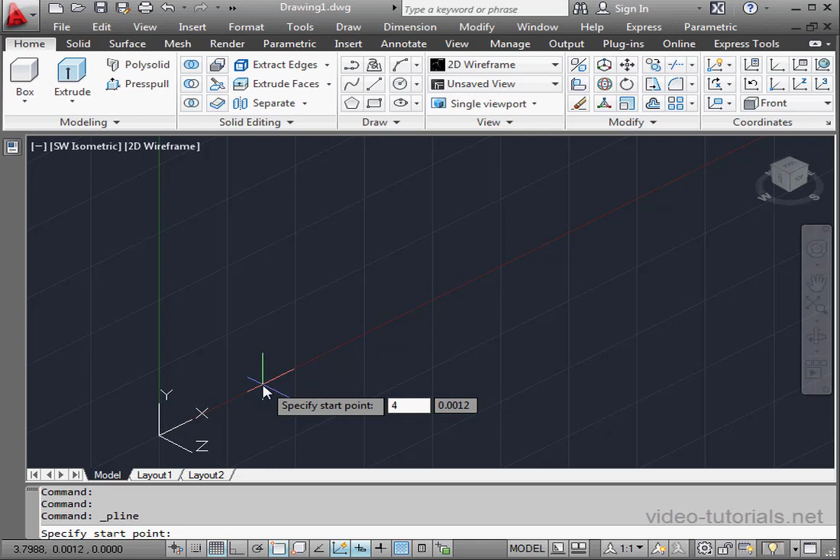First, let's change the user coordinate system to front. Now activate the polyline command. Here's my start point. 4, tab 0, press enter. Let's activate ortho mode. That'll speed things up a bit. The first line, 7.5, enter.

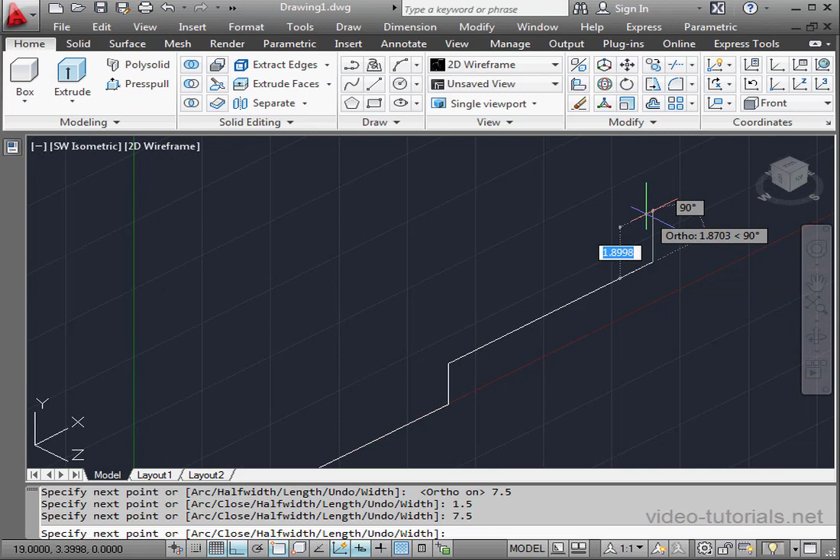Second line, 1.5, press enter. Another line, 7.5, press enter. And a vertical line, 2.5, enter. Another horizontal line, 7.5, press enter. 0.5, press enter. And another 7.5, enter. Let's right-click and select Close.

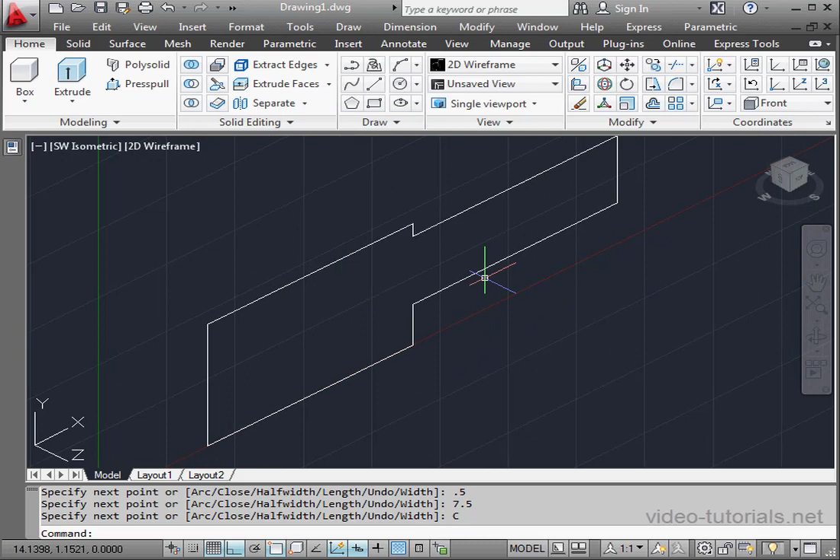Next, I'm going to place a circle. I'll use the triple tangent option. Here's my first point of tangency, the second and third. And here's my circle. Now let's activate the Trim tool. Press Enter to trim everything by everything else. Just left-click to trim my geometry. And let's press Escape to exit the tool.

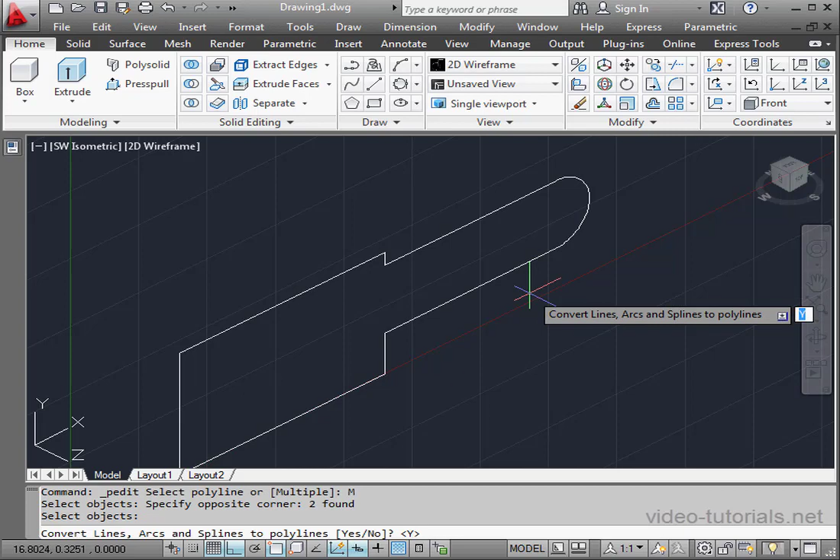Now we need to create a closed profile. To do so, I'll use the Edit Polyline command. Let's right-click and scroll to Multiple. Now we'll window select our geometry. Right-click to finish the selection. Convert to Polyline, type Y for yes, and press Enter. Let's select the Join option. For the fuzz distance, 0. Escape to exit the tool.

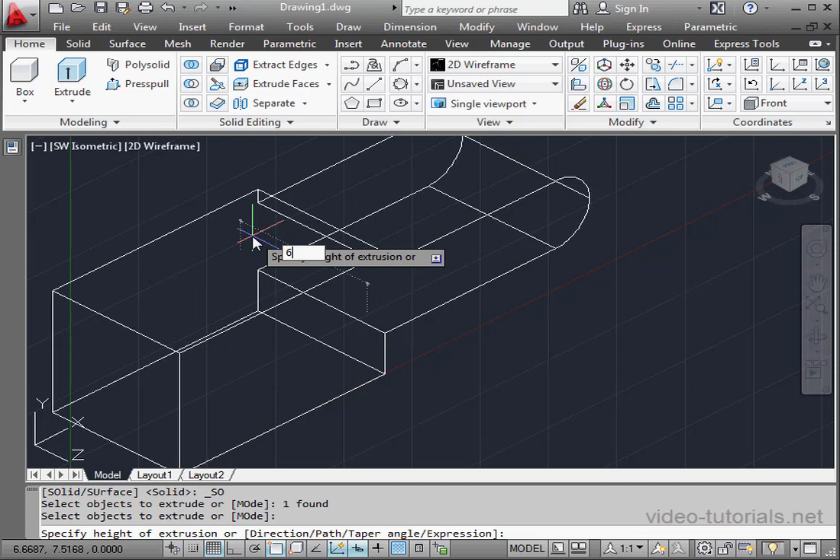Here's our closed profile. Let's activate the Extrude command now. Select our profile. Right-click to finish the selection. The distance will be 6 units. Press Enter to accept. Now let's go to the Solid tab.

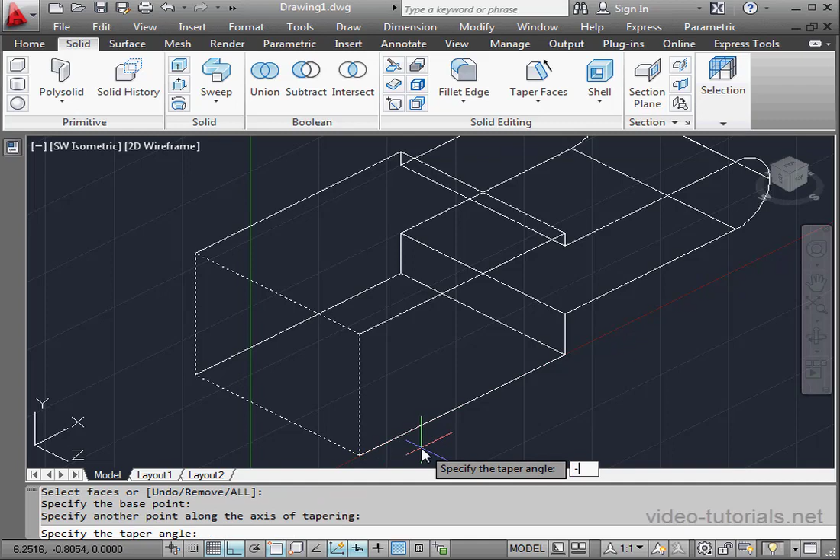I'm going to activate the Taper Faces command. Select the face to taper. Right-click and Enter to finish the selection. We specify the base point, then the second point. Now the taper angle, let's say -5 degrees.

Enter to accept. Taper again, select our faces. Right-click and Enter to finish the selection. Select the base point. And the second point, taper angle, will be -5 degrees. Enter to accept. And Escape to exit the tool.

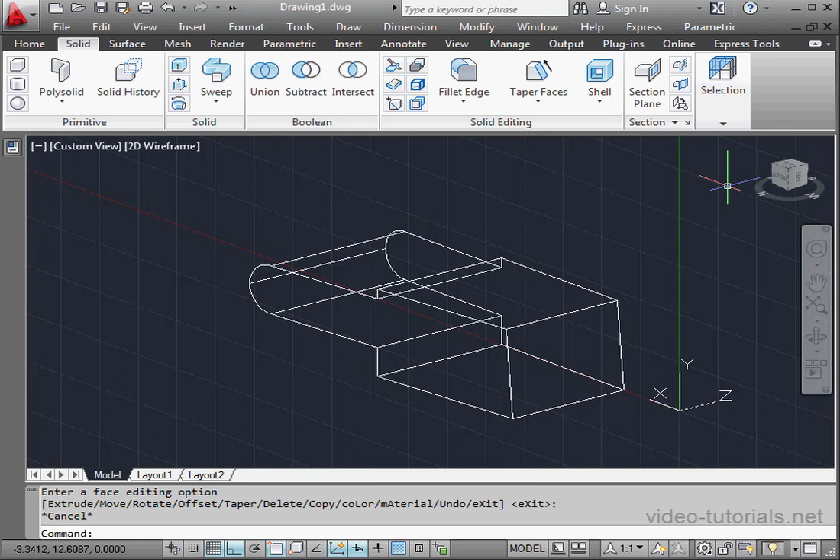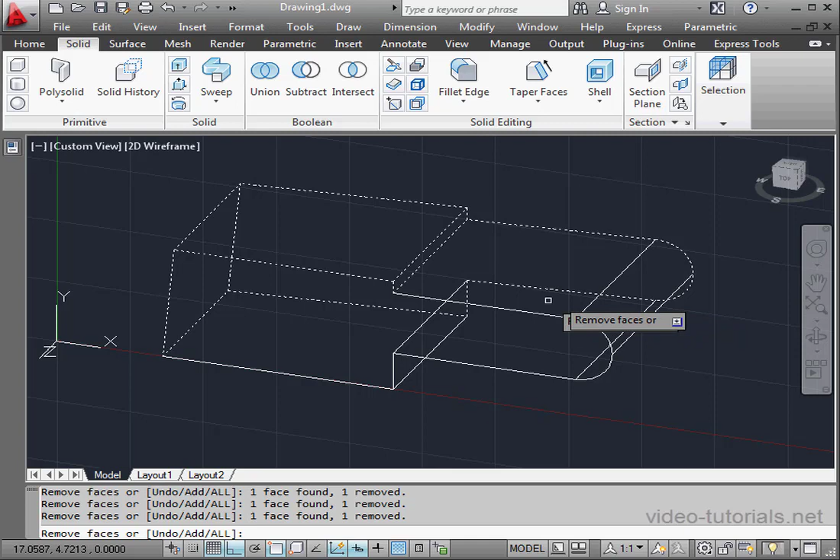Now let's activate the Shell command. Select the solid. Right-click. Now let's select the faces to remove. And this face as well. Lastly, over here. Press Enter to finish the selection. Now we're prompted for the offset distance. Let's say 0.2 units. Enter to accept and execute. And let's exit the tool. By the way, one thing I did forget to mention, these measurements are done in centimeters.

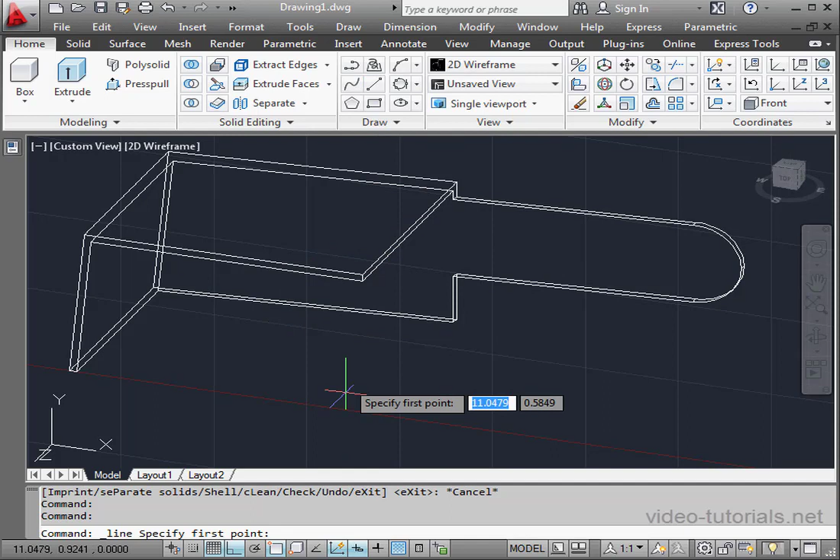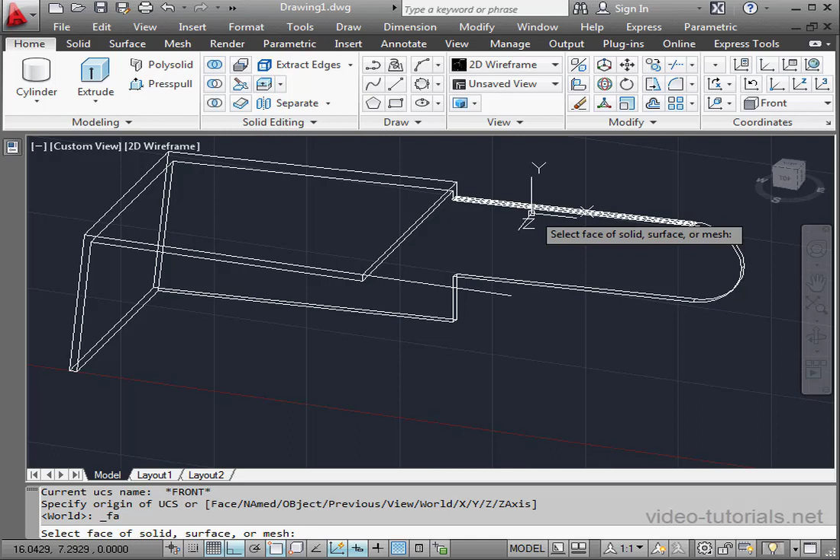Let's go back to the Home tab. Activate the Line command. Dynamic UCS is active, as well as Ortho mode, which is toggled on. Let's say 4 units here. Press Enter and Escape to exit the tool. Now bring in a cylinder primitive, center point, radius. Oops, I forgot to change the user coordinate system. Let's select the face, accept.

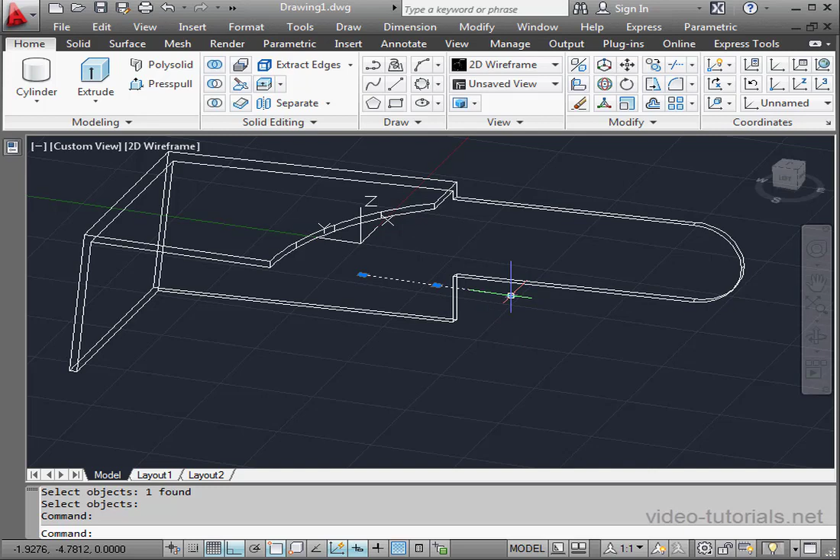Now bring in the cylinder tool. Radius will be 6.5 units. Press Enter to accept. And for the height, just drag it down so it goes through the whole solid. Now we're ready for the Solid Subtract tool. Select the shell, right-click, now the cylinder, and right-click to finish and execute. Let's select this line and delete it. And let's go back to the World User Coordinate System.

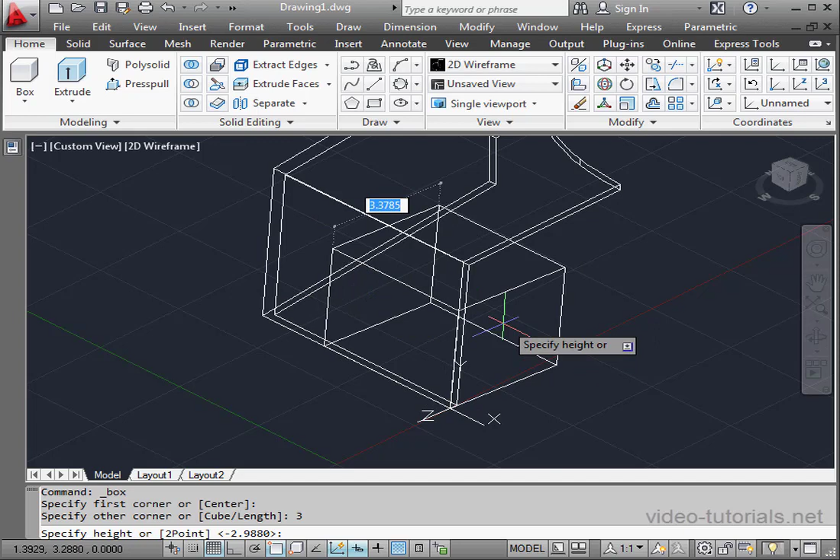I want to make a cut in the front face of the optical visor. Let's bring in a box. Dynamic UCS is still active. It'll be 4 by 3 centimeters. Press Enter to accept. And for the height, let's just drag it out past the shell and drop it. Now Solid Subtract. Select the solid, right-click to finish, select our box, and press Enter.

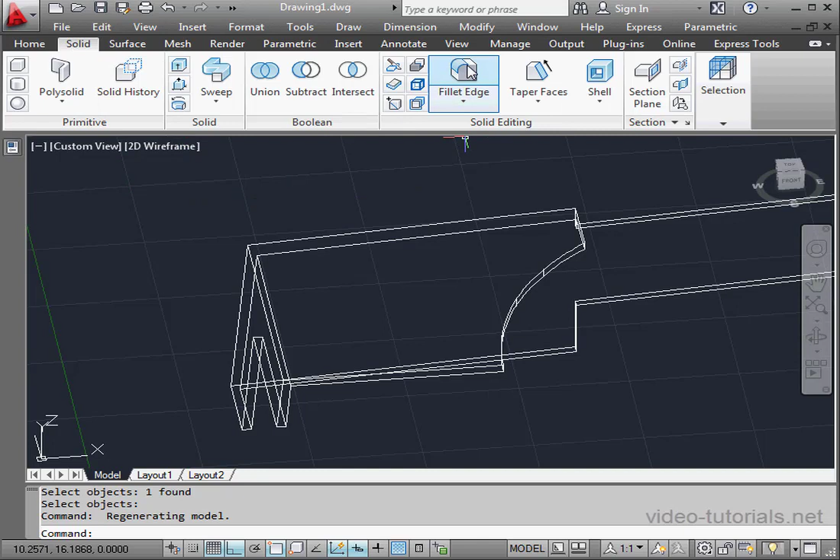Let's apply some fillets now. I could have applied those fillets before I placed the shell. That would have saved me a couple steps. But since I didn't do it, I'm just going to do it now. Let's activate the fillet command. A radius value of 1 unit is pre-selected. Let's go with that. Select the edge to fillet, enter, and enter again to close the tool. Let's apply a second fillet now.

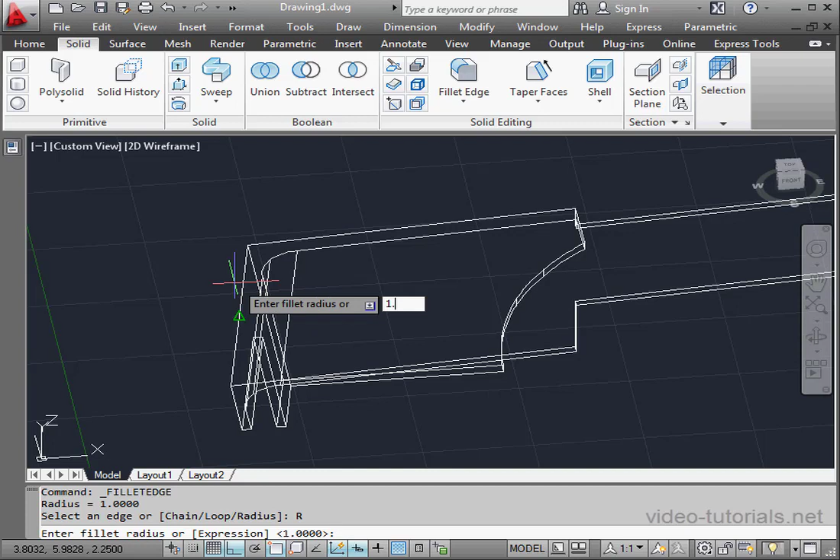Now for the outside fillet, we do need to consider the thickness of the shell. That's 2 millimeters in our case. Let's right-click and scroll to radius. Enter a value of 1.2 and press enter. Select the edge to fillet, press enter. Enter again to close the tool.

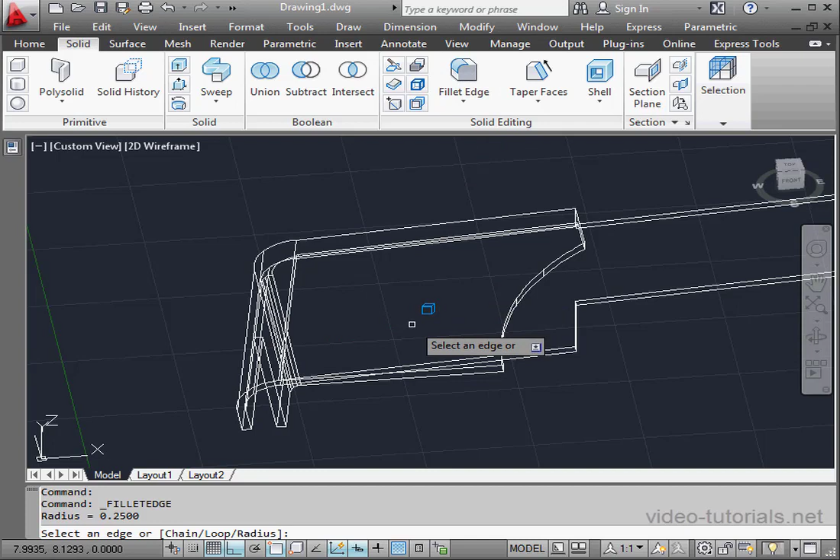We do need a couple more fillets. Right-click radius. Let's enter 0.25. Press enter. And let's select the inside edges. Enter, and enter again. Once again, the outside fillet should be 2 millimeters bigger. So the radius is going to have to be 0.45 units. Press enter. And let's select the outside edges. Enter to apply and accept, and enter again to close the tool.

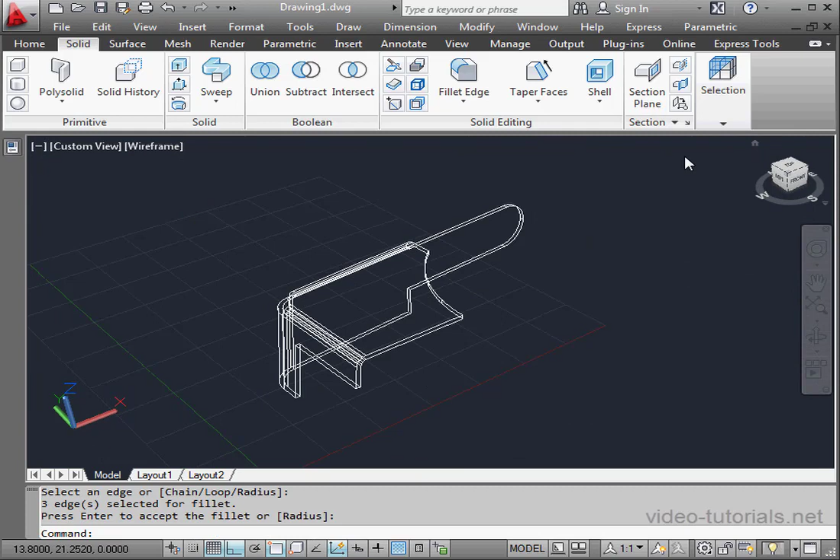Lastly here, we need to create a hole. I'll select this face, accept, activate the cylinder tool, center point, radius, 0.25 units, press enter, and let's just drag out through the shell. Now the solid subtract tool. Let's take the main body and remove the cylinder.

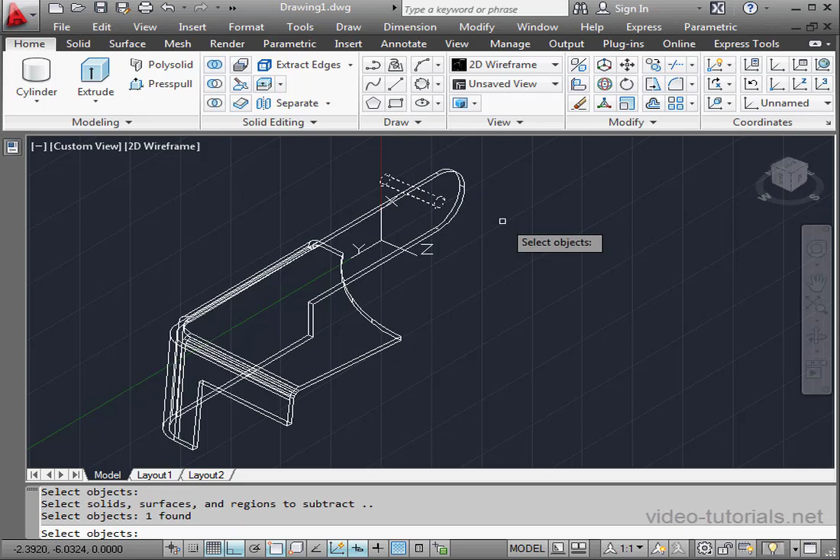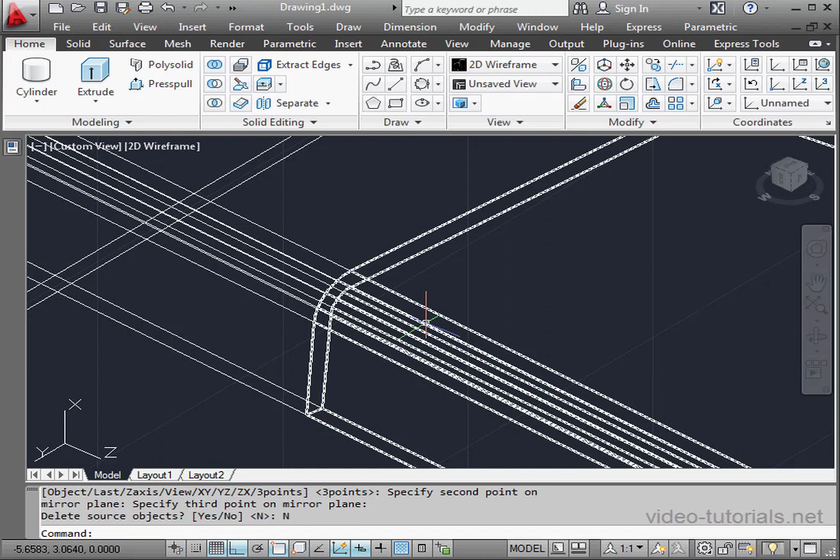Enter to accept. Next, we're going to use the mirror tool. Right-click to finish our selection. Now we select the 3 points of the mirror plane. And third point, do we want to delete the source objects? No. And finally, let's combine these solids. Activate the Solid Union command. Make our selections. Press Enter to execute.

Let's go back to the world coordinate system and take a realistic view. And here is our optical visor. And this concludes exercise lesson 67.